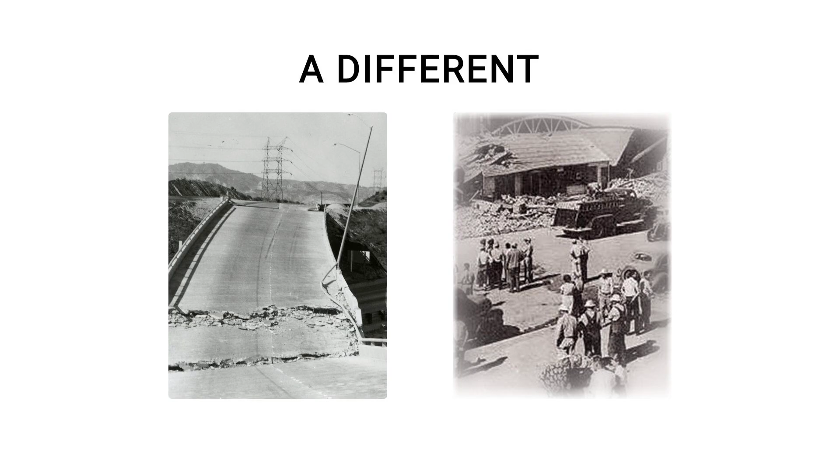4:31 in the morning, January 17th, 1994. The San Fernando Valley is asleep. Then, without warning, the ground accelerates upward. The force hits 1.8 G, nearly double the force of gravity. This is not the rolling motion Californians are used to. It is a violent punch from directly below.

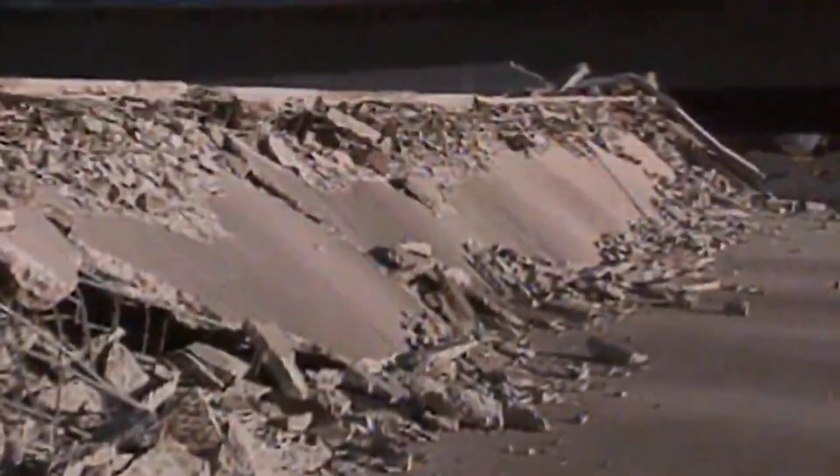In an instant, the power grid fails, and the entire Los Angeles basin plunges into absolute darkness before the shaking even stops. Engineers believed the city was ready for the big one. They were confident in their codes, but they were wrong. The $20 billion that followed was not just for repairs. It was the price of learning that the city was built on outdated assumptions.

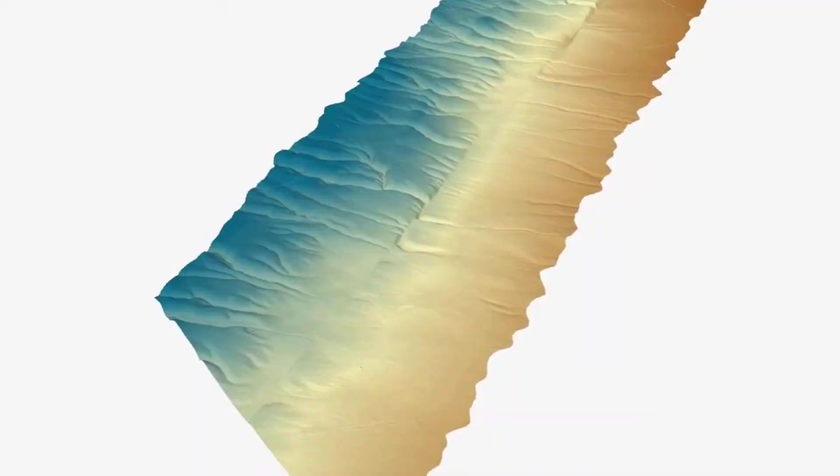The violence came from a blind thrust fault. Unlike the famous San Andreas, which leaves a visible scar on the surface, this fracture was buried deep underground. It had been silently storing energy for centuries, invisible to geological maps, hiding directly beneath the suburban grid. When it finally ruptured, it did not just shake the ground, it deformed the entire valley.

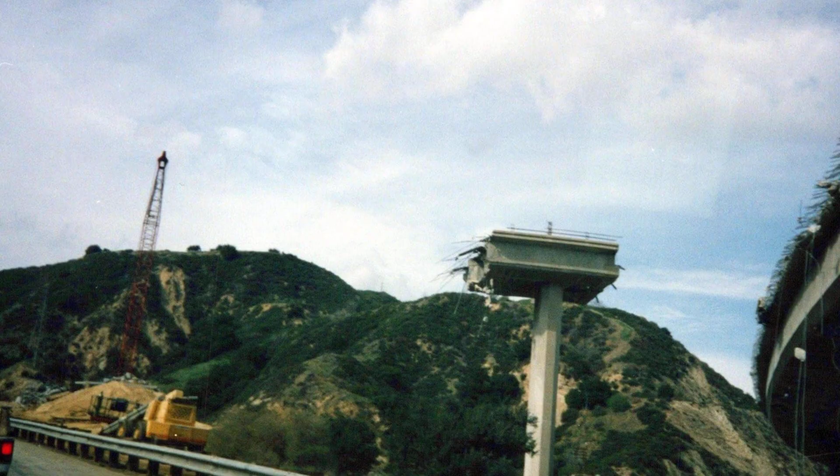At Newhall Pass, where Interstate 5 meets Highway 14, the infrastructure faced a test it had failed before. The Gavin Canyon undercrossing had collapsed during the 1971 Sylmar earthquake. It was rebuilt, but the design flaws remained. As the ground heaved, the southbound lanes snapped.

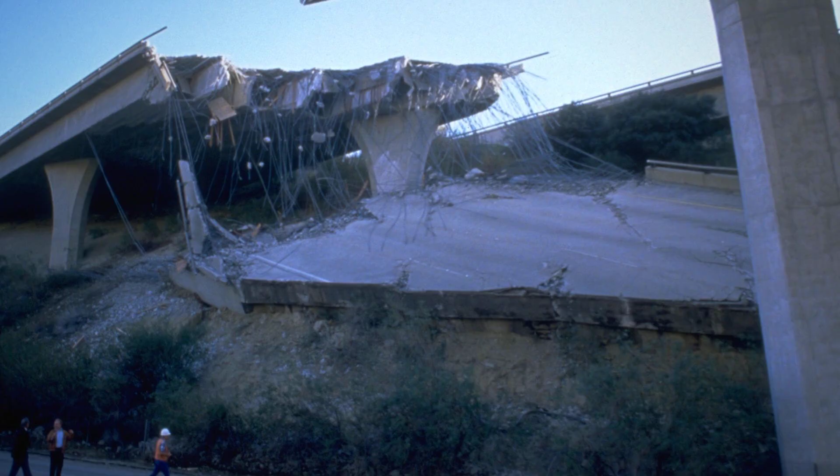In the pre-dawn darkness, LAPD motorcycle officer Clarence Wayne Dean was reporting for duty. He was riding south on Highway 14, likely seeing only the black horizon. He could not see that the freeway ahead of him had vanished. He rode off the edge of the collapsed structure, falling 30 feet into the wreckage below. His death was not an accident of nature. It was a failure of engineering.

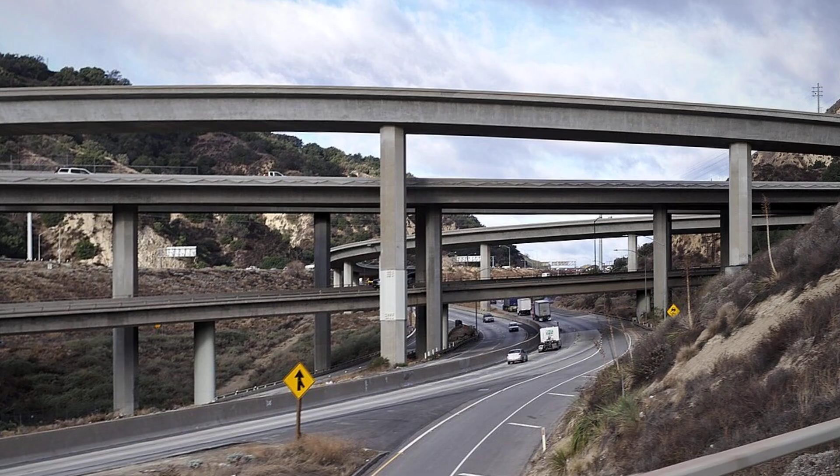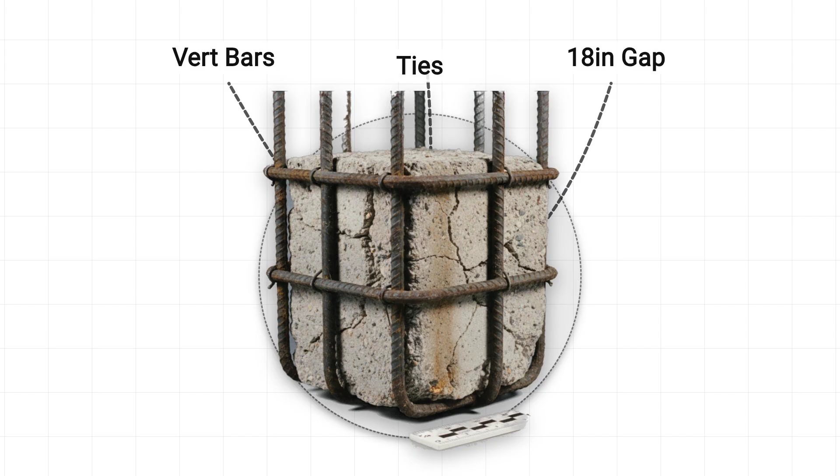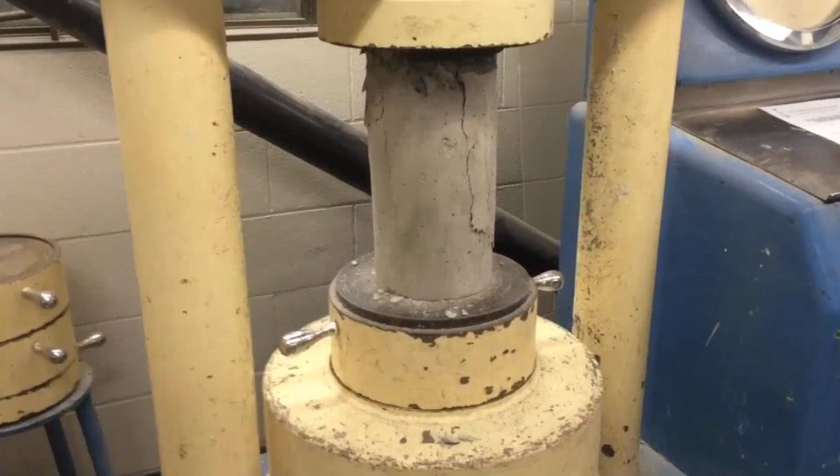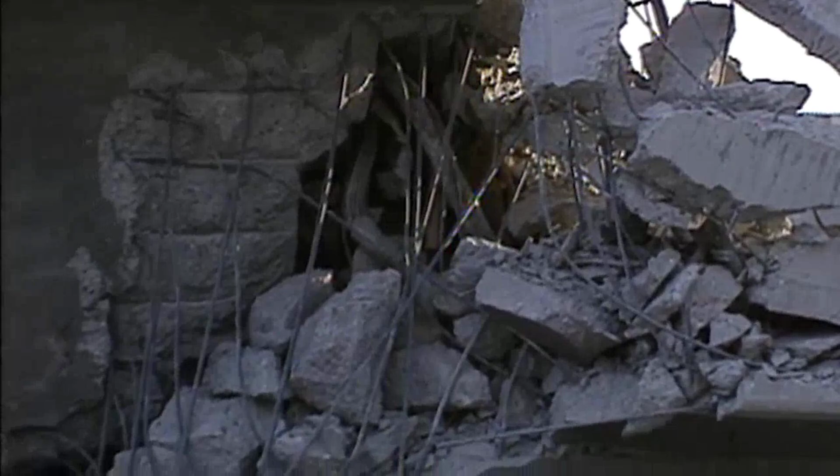The culprit was column shear. The massive concrete pillars holding up the freeway bridges looked strong, but they were brittle. Inside the concrete, the vertical steel bars were held together by horizontal ties. In 1994, those ties were spaced too far apart. Under the intense vertical acceleration of the quake, the concrete core had nowhere to go. It exploded outward, crumbling like dry chalk. Without that core, the steel buckled, and the heavy road deck slammed into the ground.

Miles away, the Santa Monica Freeway, Interstate 10, suffered the same fate. This is the busiest freeway in America, the primary artery connecting West Los Angeles to downtown. At La Cienega Boulevard, the bridges failed catastrophically. The collapse did not just block traffic, it severed the economic lifeline of the region. Millions of commuters were suddenly cut off.

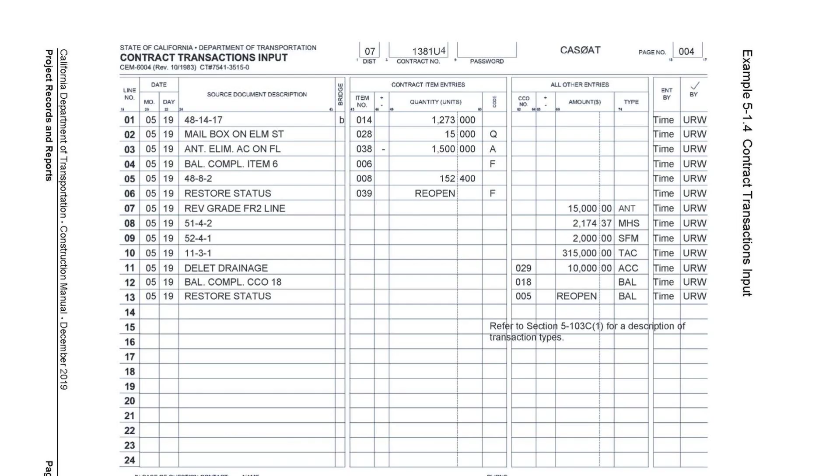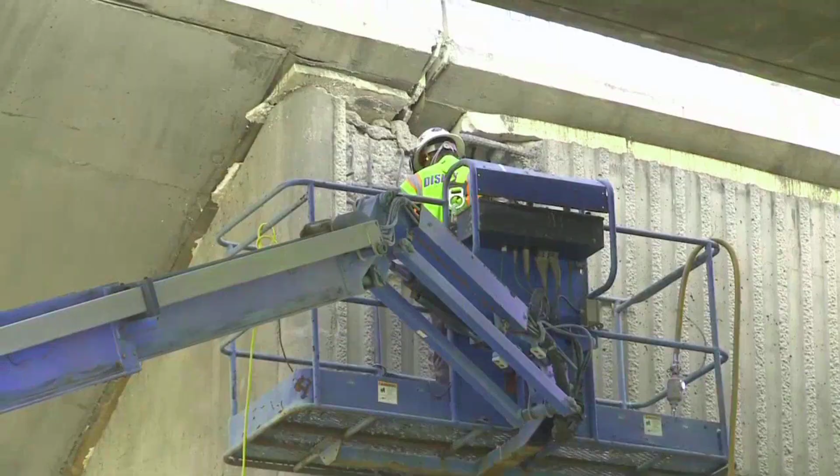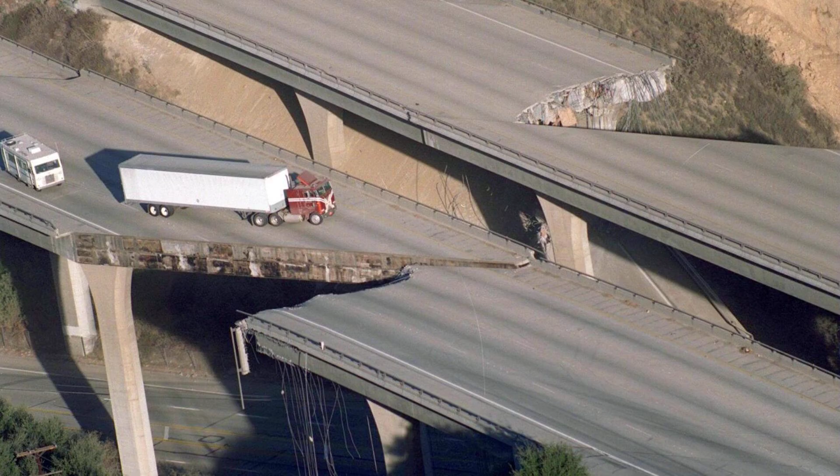The tragedy is that this vulnerability was not a mystery. Caltrans engineers knew about the danger of non-ductile concrete columns. They had identified the risk after 1971 and had even started a retrofit program. But the program was slow, underfunded, and politically unsexy. They were in a race against geology. And on that January morning, the geology won. The freeways were the most visible scars, capturing the news cameras. But while the concrete lay in ruins, a more dangerous failure was hiding inside the buildings that remained standing.

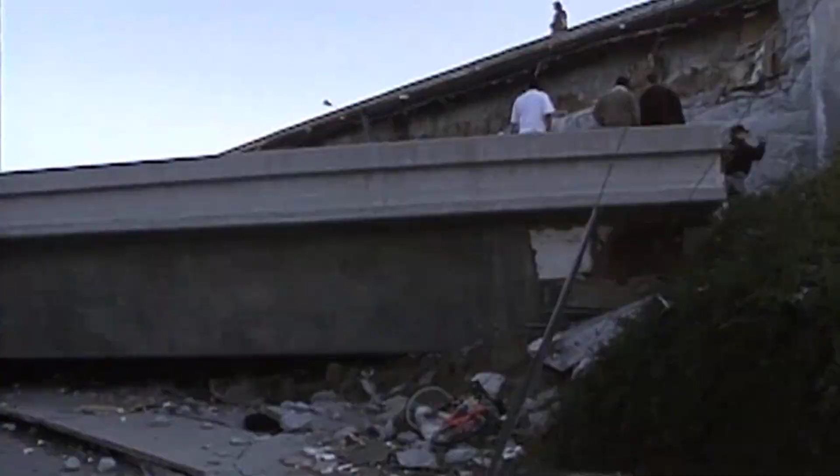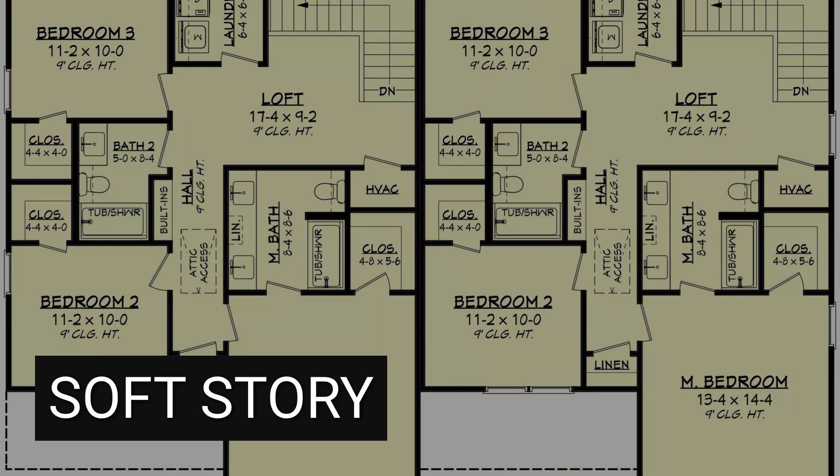While the broken freeways dominated the morning news cycle, a more intimate and terrifying tragedy was unfolding on Reseda Boulevard. The Northridge Meadows apartment complex looked like thousands of other buildings in the San Fernando Valley. A 3-story stucco building, built in the 1970s. But it harbored a structural defect that engineers call a soft story. To maximize space for cars, the ground floor consisted of open carports held up by slender wood posts, while the heavy apartments above were stiffened with walls. There was a mismatch in rigidity.

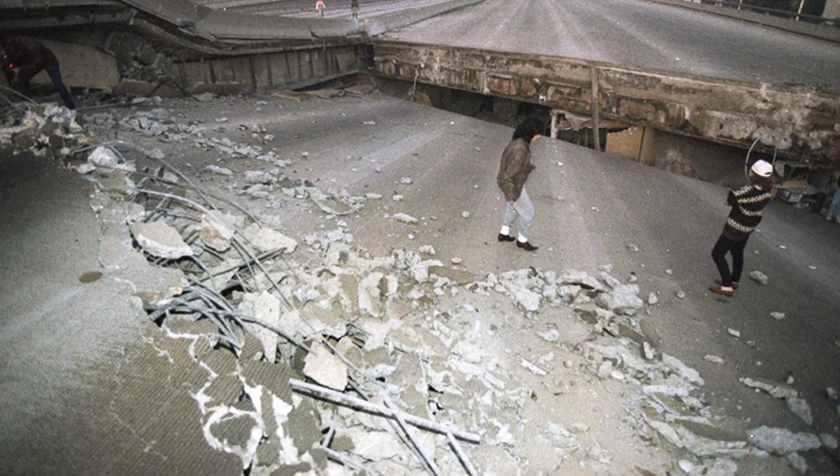When the earth punched upward, the heavy upper floors moved as a solid block. The flimsy ground floor could not handle the lateral shift. It did not just crack, it folded. In seconds, the building knelt down. The second floor slammed into the pavement, obliterating the parking level and the apartments directly adjacent to it. 16 people were killed, most of them crushed in their beds before they could even wake up. It remains one of the deadliest structural failures in modern California history.

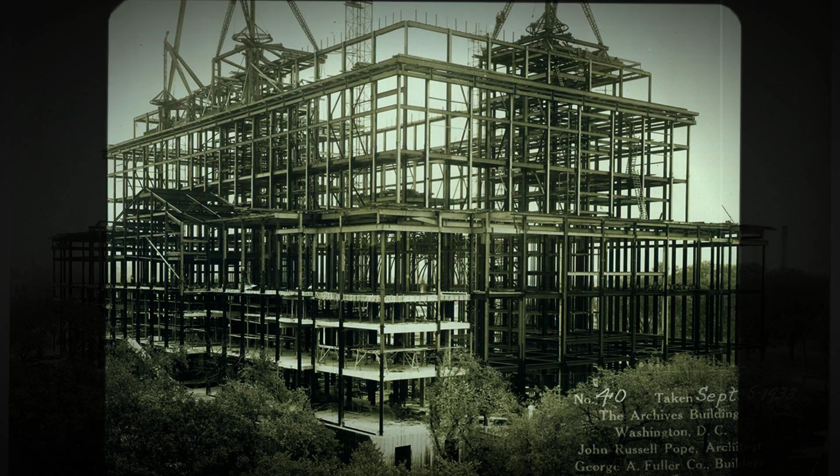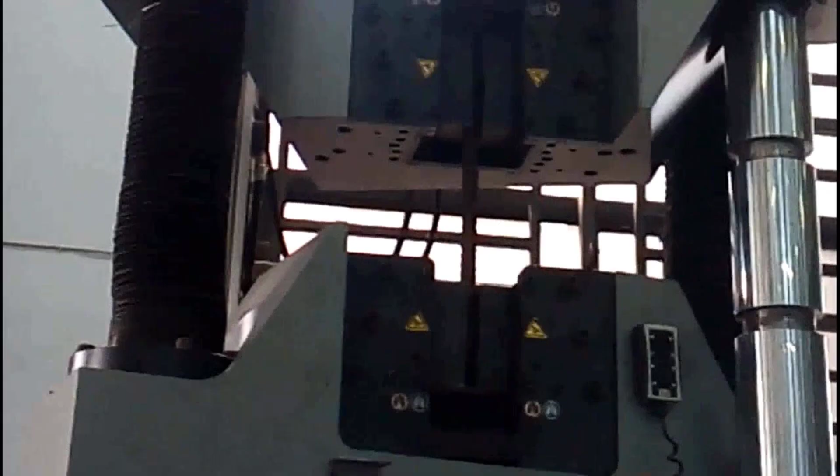The mechanics were simple. You cannot put a heavy, stiff box on top of a weak, flexible table and expect it to survive a kick from below. That risk was known, but it had been tolerated as an acceptable gamble. Northridge called that bluff. Yet, as rescue crews worked through the rubble of wooden apartments, a far more complex crisis was brewing in the steel towers that defined the Los Angeles skyline. For decades, engineers believed that welded steel moment frames were the invincible backbone of modern construction. The theory was based on the material properties of steel itself.

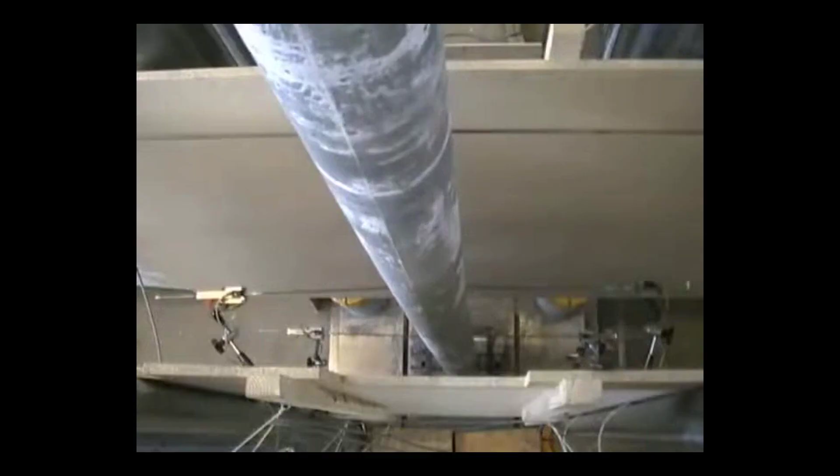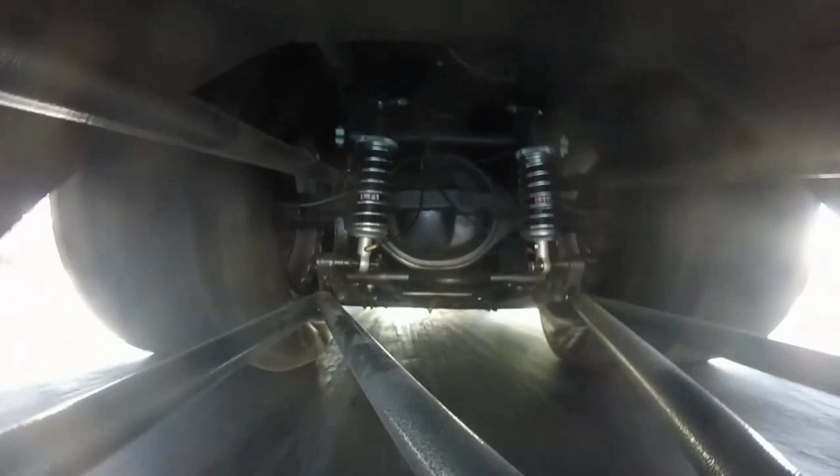Steel is ductile. Unlike concrete, which cracks, or wood, which snaps, steel is supposed to yield. It stretches and bends, absorbing the kinetic energy of an earthquake like a massive shock absorber. A steel building might come out of a quake leaning or deformed, but it would never break. That assumption shattered along with the ground.

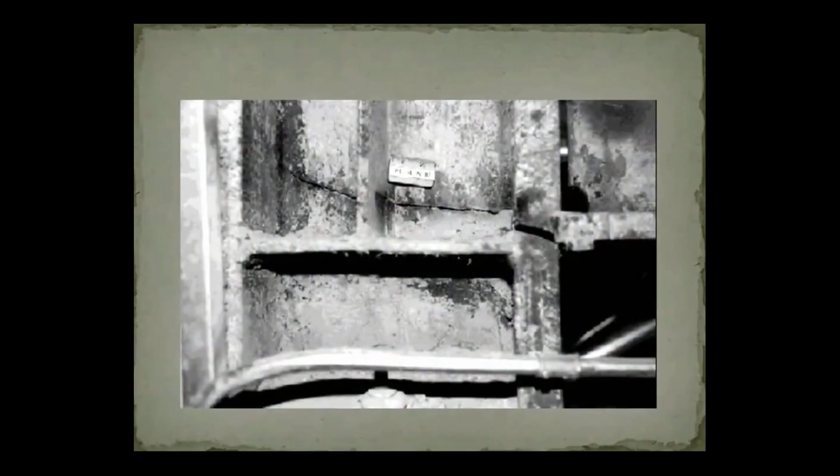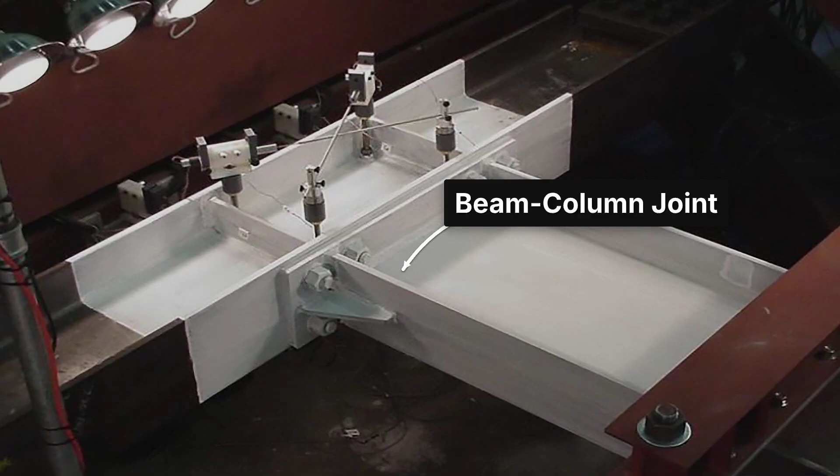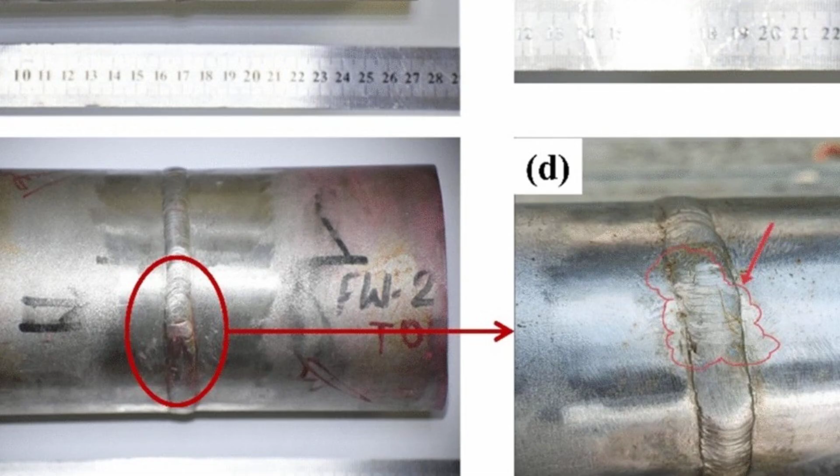In the weeks following the quake, inspectors began peeling back the drywall and fireproofing in buildings that, from the outside, looked perfectly fine. What they found inside sent a shockwave through the global engineering community. The connections where the horizontal beams met the vertical columns, the pre-Northridge connection, had not stretched. They had fractured. The welds connecting the thick steel flanges had cracked like glass. In some cases, the columns themselves were torn apart by the stress.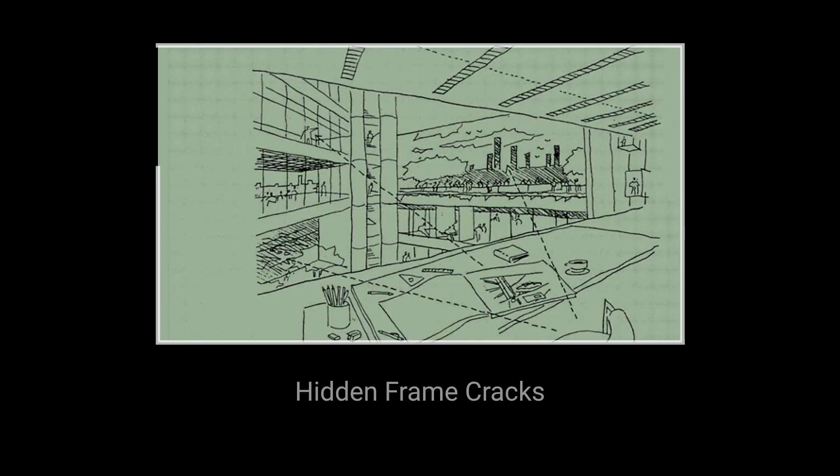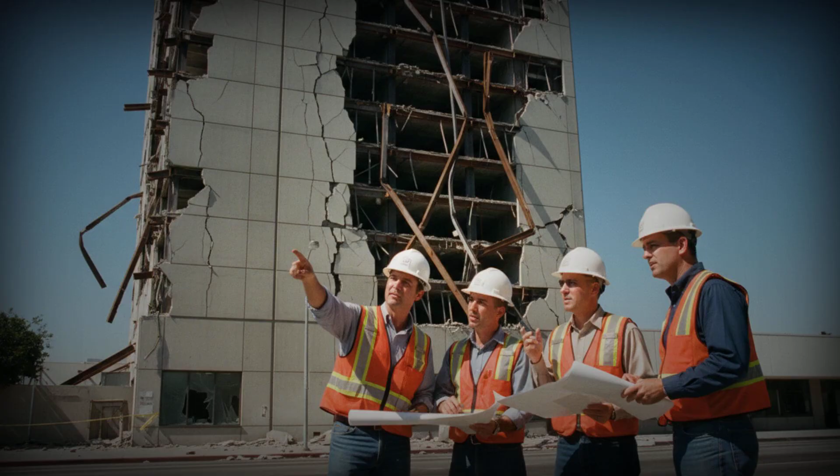The energy of the quake had not been absorbed by the bending of the beams. It had attacked the joints directly. This was a brittle failure in a material chosen specifically for its flexibility. It was a catastrophic blind spot. These buildings had not collapsed, but they were structurally dead. The skeleton was broken. Hundreds of modern buildings, the places where people worked and lived, were suddenly revealed to be ticking time bombs. The industry had to face a terrifying reality.

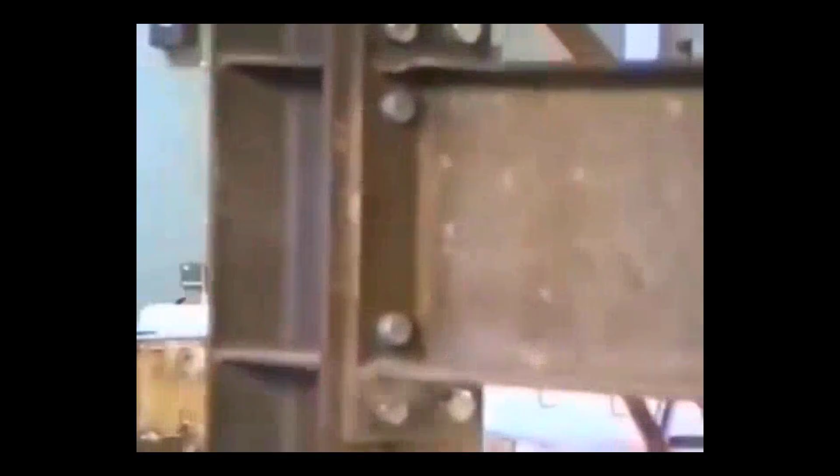The standard way of building skyscrapers in earthquake country was fundamentally flawed. The city could not just patch the cracks. The entire philosophy of how to connect steel had to be rewritten from scratch. The financial impact was staggering. Northridge caused $20 billion in direct damage. Adjusted for inflation, that figure today would exceed $40 billion.

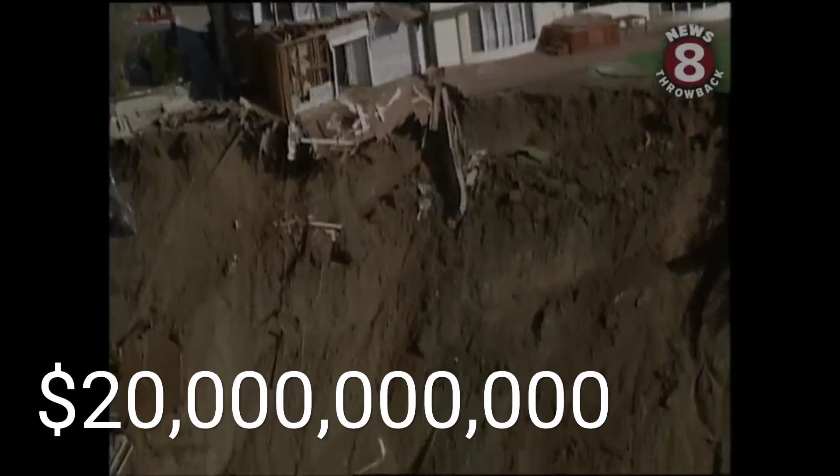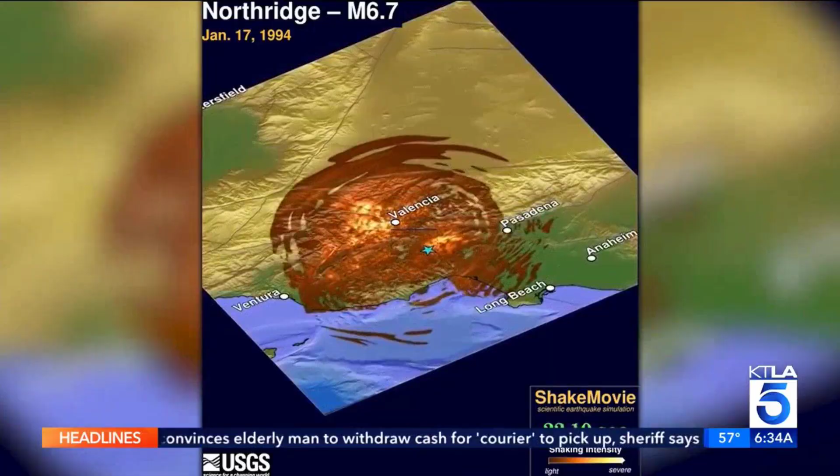It was the costliest natural disaster in United States history at the time, bankrupting smaller insurance carriers and forcing the creation of the California Earthquake Authority. But the check written for repairs was actually a tuition payment. Los Angeles had just received a crash course in near-source physics. Before 1994, seismic maps largely ignored the specific violence of faults located directly under urban centers. They averaged out the risk.

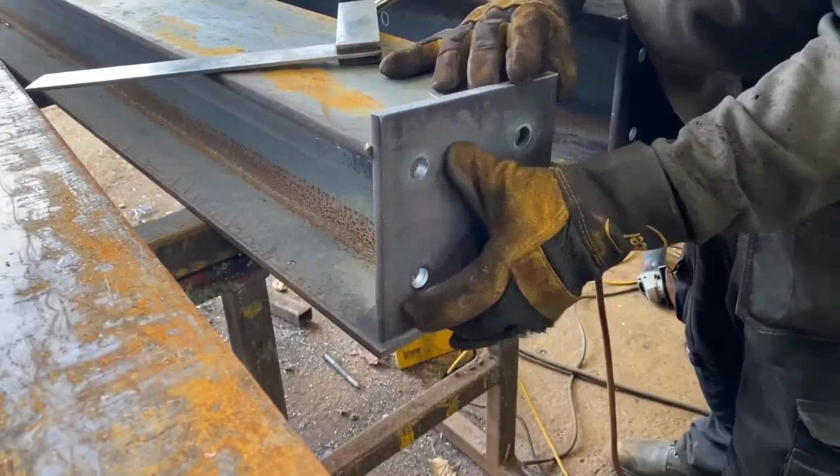Northridge proved that when you are right on top of the rupture, the ground motion contains a massive fling pulse, a single coherent wave of energy that slams into a structure with high velocity. The code had to be updated to account for these killer pulses. The most dramatic change happened in the steel industry. The pre-Northridge welded connection was effectively banned.

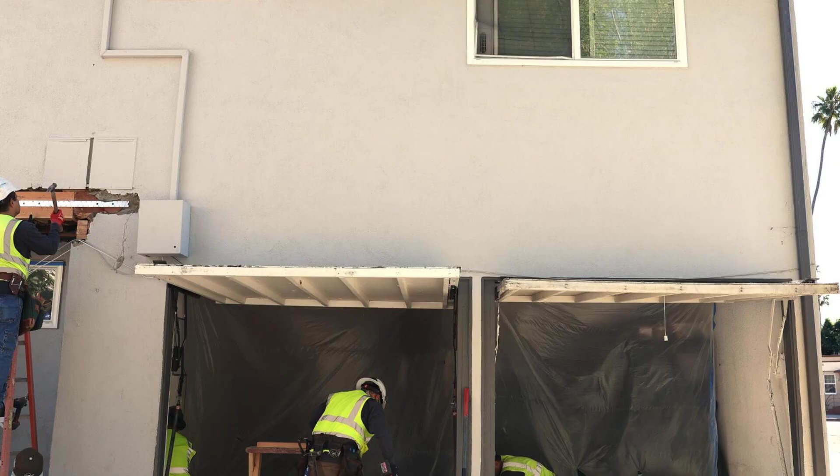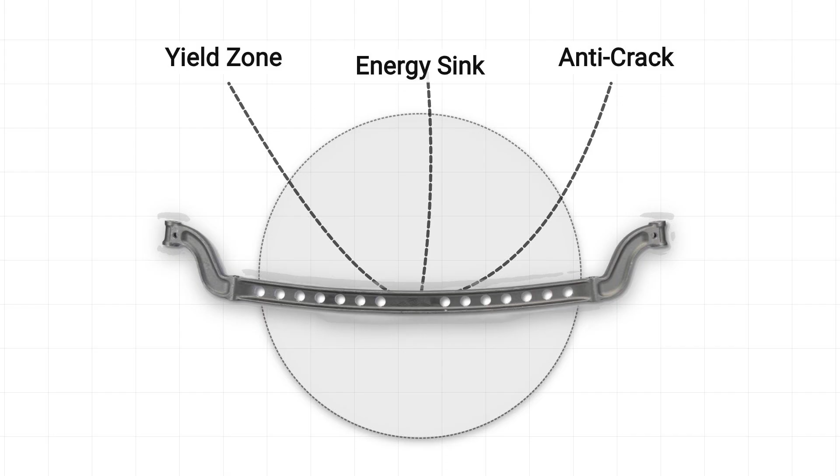Engineers developed a counterintuitive solution to save the buildings. They weakened the beams on purpose. By deliberately cutting away a section of the steel flange near the connection, a shape that looks like a dog's bone, they force the beam to yield at that specific spot. This dog bone cut acts as a fuse. It ensures that the beam bends and deforms safely away from the brittle weld, protecting the critical connection to the column. If you see a steel tower going up in Los Angeles today, that geometry is hiding inside the walls.

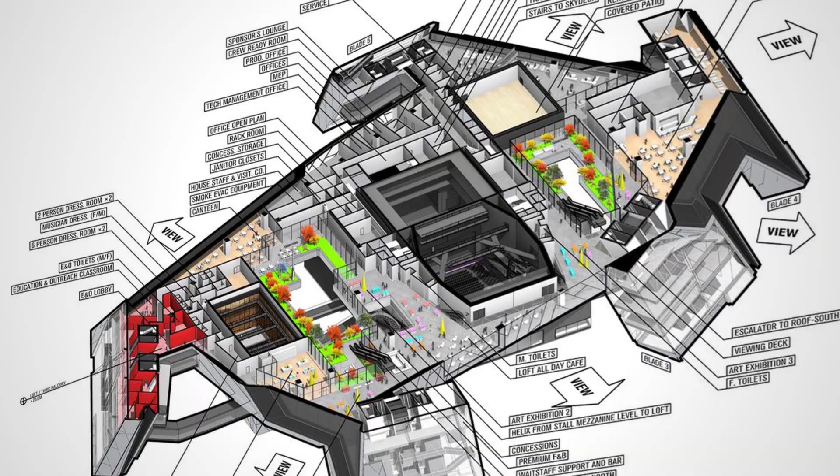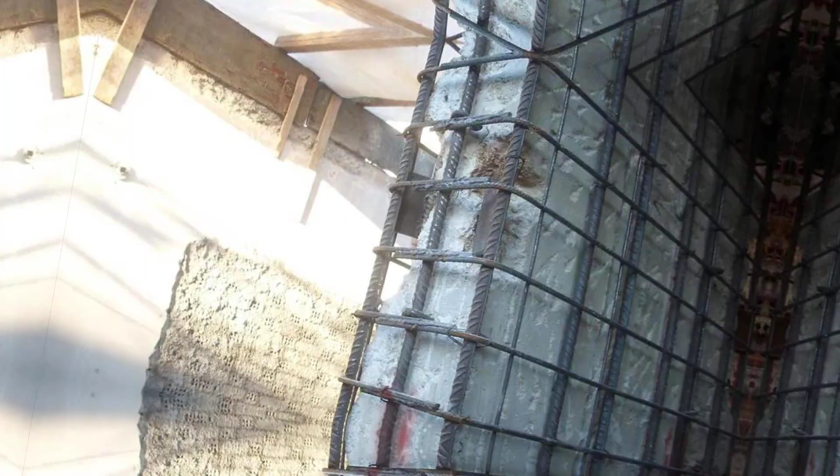At the same time, Caltrans launched a frantic political and engineering campaign to armor the state's bridges. They wrapped thousands of concrete columns in steel jackets. These casings provide the confinement that the old rebar ties could not. Now, when the concrete core tries to explode outward under pressure, the steel jacket holds it tight, maintaining the column's strength even as the earth tries to shear it in half.

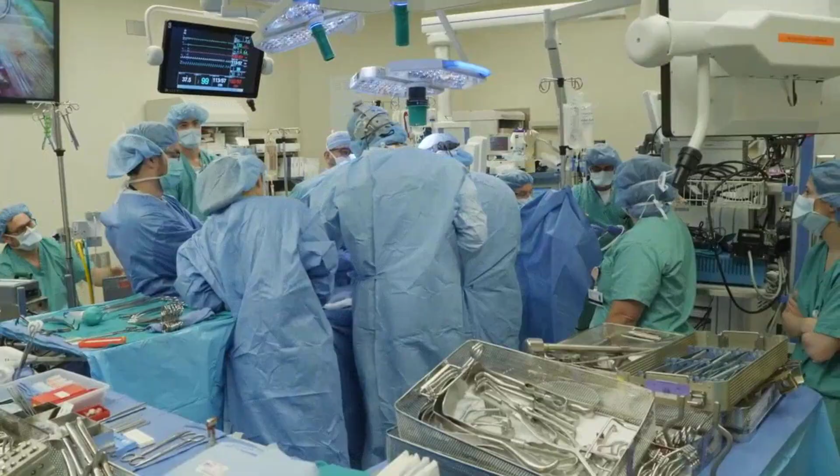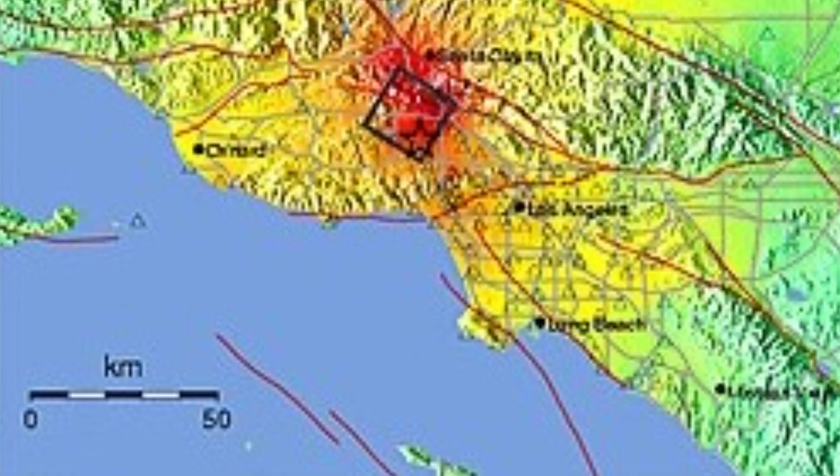But the ultimate proof of concept came from the USC University Hospital. While other medical centers in the valley were evacuating patients through dark, debris-strewn hallways, the USC facility remained fully operational. It did not just survive, it barely felt the quake. The building sat on base isolators, massive rubber and steel bearings that decoupled the structure from the ground. When the earth moved 18 inches, the hospital stayed still, floating above the violence.

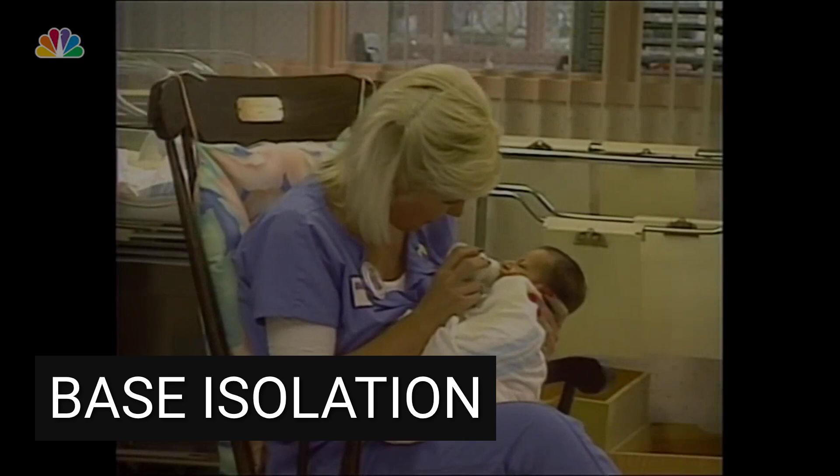This cemented a shift in philosophy. The goal moved from life safety, building a structure that does not kill you when it dies, to resilience. The new standard was a building that could take the hit and open for business the next morning. Northridge ended the era of engineering arrogance. It proved that building codes are reactive documents, written in the debris of the failures that came before. We learned that nature always has more energy than we have concrete.

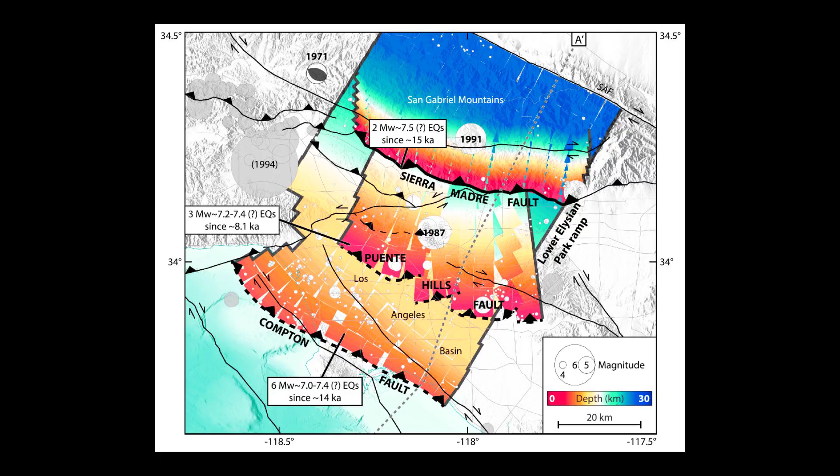Yet the threat lingers. Thousands of soft-story apartments and non-ductile concrete buildings still stand in Los Angeles, waiting for the retrofit funds that have not come. The geology has not changed, only our understanding of it has.